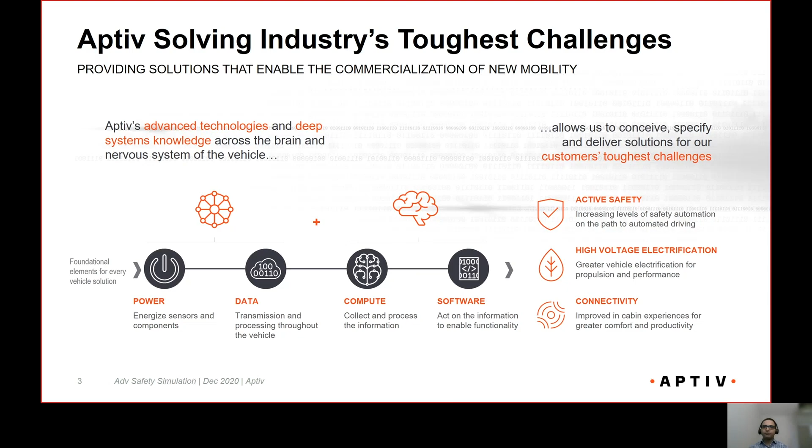We see continued acceleration of these safe, green, and connected technologies. Active safety, shown here, is just one example. For Aptiv, we help our customers thrive in this environment by acting as a trusted technology partner that empowers this transition. For leading OEMs, we can act as co-creation partner, helping to solve their toughest challenges, as we have a long track record of creating and integrating these complex solutions. Then, as those solutions mature, we find ways to optimize it, helping democratize the technology or make it mainstream.

Having the strong demand for increased functionality in advanced safety capabilities, it is really crucial for us to ensure verification and validation of such systems. Right now, the main approach for test and verification of advanced safety systems is brute force validation. A fleet of test cars are used to drive on public roads and test tracks to collect data and analyze the system performance. This method, however, has its own limitations. It is very expensive, time-consuming, and also potentially dangerous.

Besides this limitation, growing complexity of such advanced systems, as well as more strict requirements, lead us to consider other methods that complement field test data and improve the situation. And that brings us to consider simulation environments where we can save time and effort by utilizing such environments for verification and validation of advanced safety solutions.

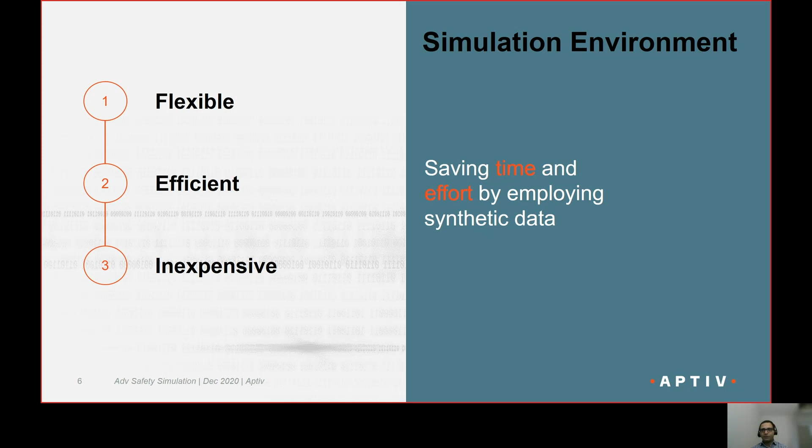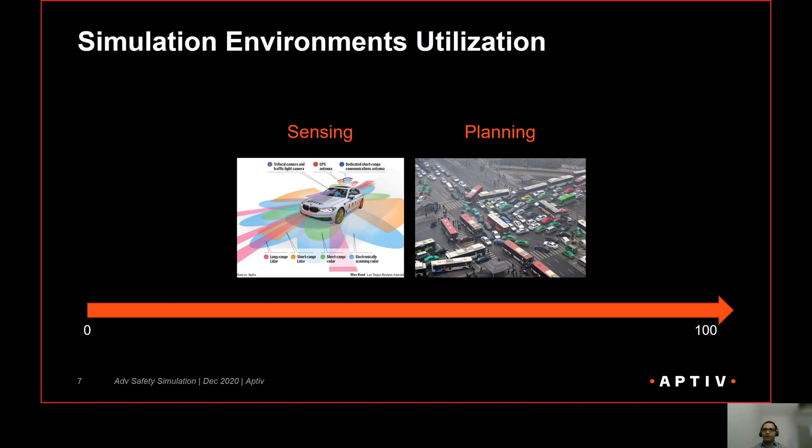Now let's imagine we have a scale that indicates simulation environment utilization in advanced safety with respect to these two blocks, from left to right from 0 to 100. So let's see what we can see using this scale. We see that currently the sensing block is not really gaining from simulation tools compared to the other block, planning, where many developers take advantage of simulation tools to test and verify their functions. So then we might ask ourselves this question: why is it that sensing is not gaining from simulation tools compared to planning?

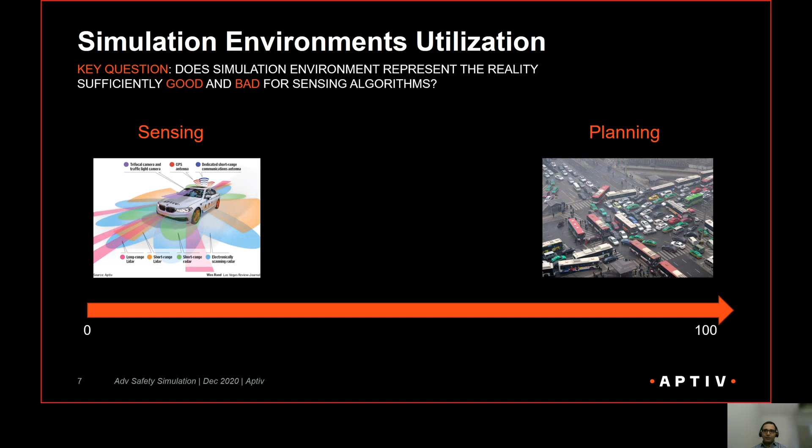When you think of it, you should think of the different nature of the sensing block, and you may wonder whether or not simulation environments are suitable for the sensing algorithm or for the sensing block. Therefore, you can come to the key question: does the simulation environment represent reality sufficiently good for the sensing algorithm? And that was the main question that we tried to address. And I think everyone in the industry, in this community, should also consider and think about it.

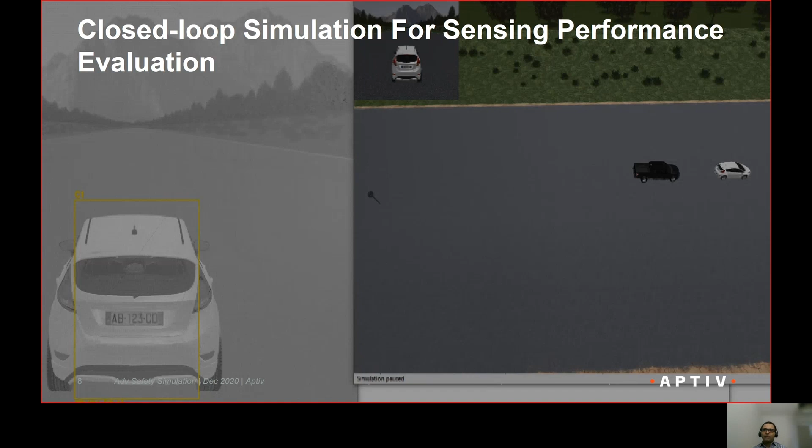Having that key question in mind, we started a project to understand the similarities and correlations between real and synthetic data. We aimed for a closed-loop simulation to evaluate performance of our sensing algorithms and compare it to the real-world data. In the simulation environment, we have a world model where inside that there is target, illumination, weather, and also ego vehicle, so we can model those items. And then sensor model, in our case, it's only camera or vision sensor. And inside the camera model, we have a lens and imager.

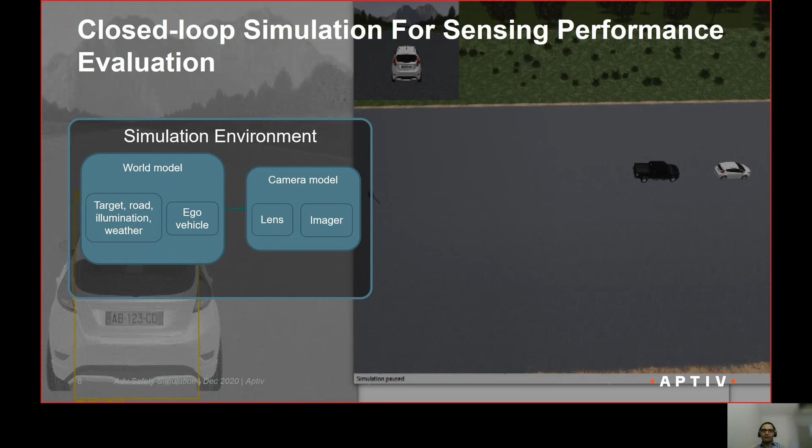So out of this environment, synthetic data is generated and sent to our environment, where we use our tool chain to process this synthetic data. So we have our own sensor processing SIL block where our algorithm processes the synthetic data and generates some detections, some objects like traffic signs, lanes, objects, cars. And then those detections are fed to the next block, feature functions, where some functionalities are implemented like automatic braking, ACC, or lane keeping assist, and then we close the loop. So we get the closed-loop simulation.

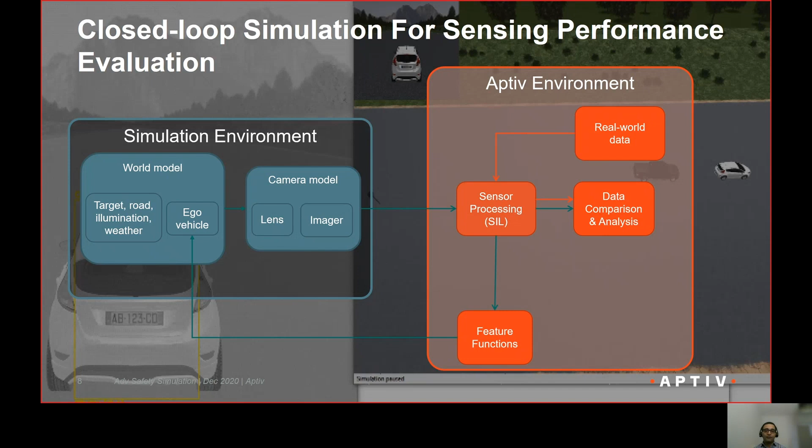So remember that the aim was to really see the similarities and analyze the sensor performance algorithms. So for that, we also use the data that we have already collected in our projects from public roads and from test tracks, and then we inject that data into the SIL, and then try to compare and analyze the sensing performance with respect to these two types of data. So that's what we did in this project.

And that's kind of the data that sensing needs. It doesn't need perfect data. It's also good to mention that we perform another set of tests, which are specifically designed to measure the optical performance of our lens model. So by doing that, we ensure that the lens and eventually the camera model that we have in simulation environment are modeled as close as possible to the reality, so they are close to the ones that we already use in our production. So using this camera model, we generate data which are suitable, proper, and ready to be processed.

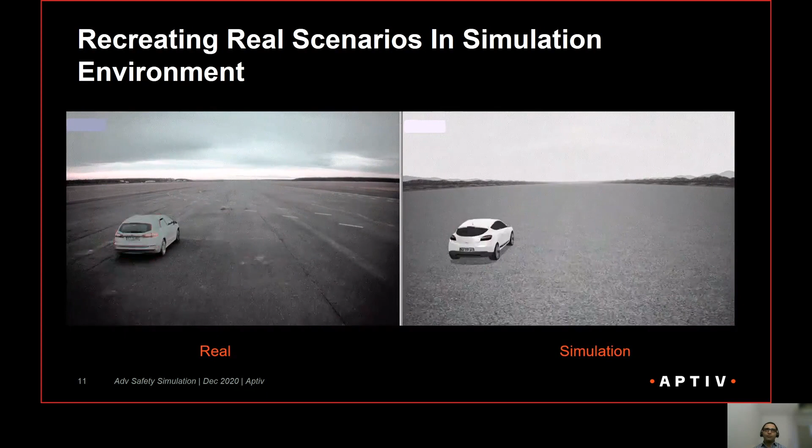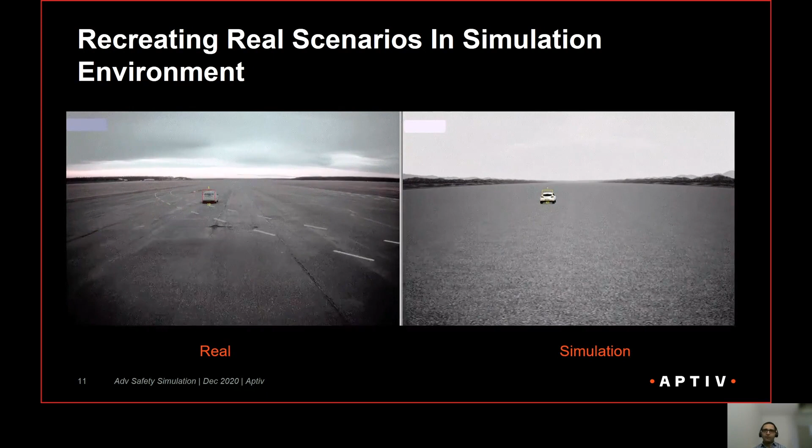So I want to show you the next slide where we recreate these real scenarios in simulation environment. On the left, you see the real world data. On the right is simulation environment where we try to mimic the reality. So I go to the next video, and recreating these scenarios in simulation environment, we try to see what is the performance of the sensor. So you see the red box around the target car. That is a detection from our sensors. And in our tool chain, we log this data to analyze and compare the performance in these two different environments.

Now, let me share some remarks, lessons that we learned from this project. First, when you think of simulation environments, note that synthetic data can be used for complementing field test data, not replacing it. So we are not going to remove the real data or field test data, but we want to improve the situation with simulation tools with synthetic data. So definitely we need real data. Second, there is a misconception that synthetic data is too easy or too biased for the sensing algorithms to detect. But what we saw was that it's not the case, and synthetic data can really challenge the algorithm. It was shown in the table that I shared with you.

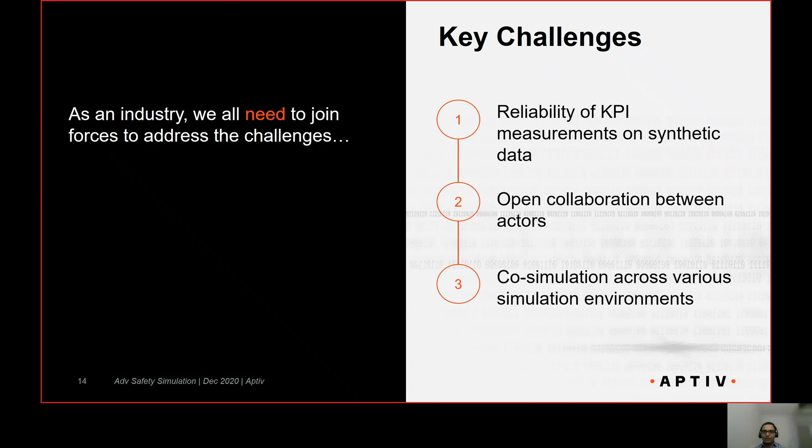And last but not least, enabling co-simulation possibility across various simulation environments. We see the tendency in our customers that they want to have their own simulation tools and sensor models, but sometimes it is not really easy to co-simulate these different environments to integrate sensor models. So it's really hard to integrate these environments and make them talk to each other and get in sync. So instead of developing new tools, we should enable co-simulation between these simulation environments and think of interfaces or standards that enable this.